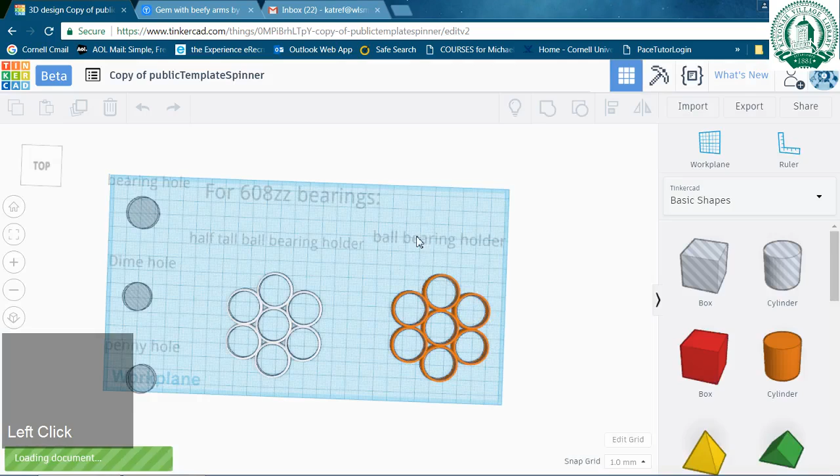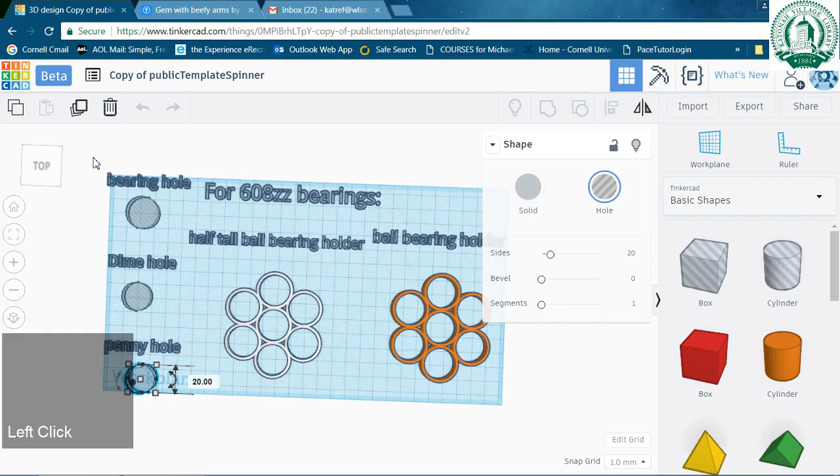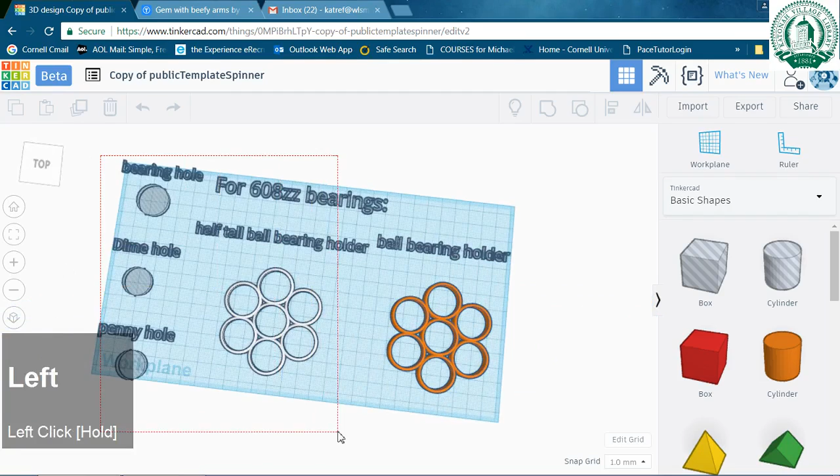In our particular case, we are going to get rid of all this extra stuff, we don't need any of that. We just want to use this guy right here. Honestly, we don't need most of these rings in this particular case either, so I'm going to get rid of some of these. In your case, you can keep them, or delete whichever ones you want.

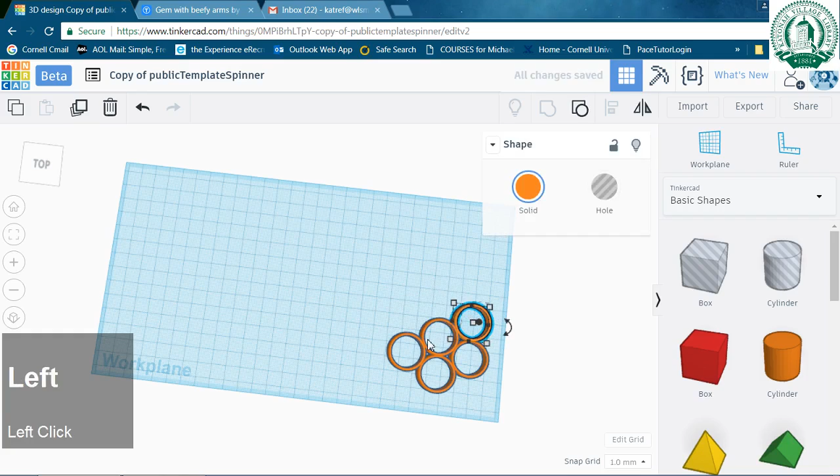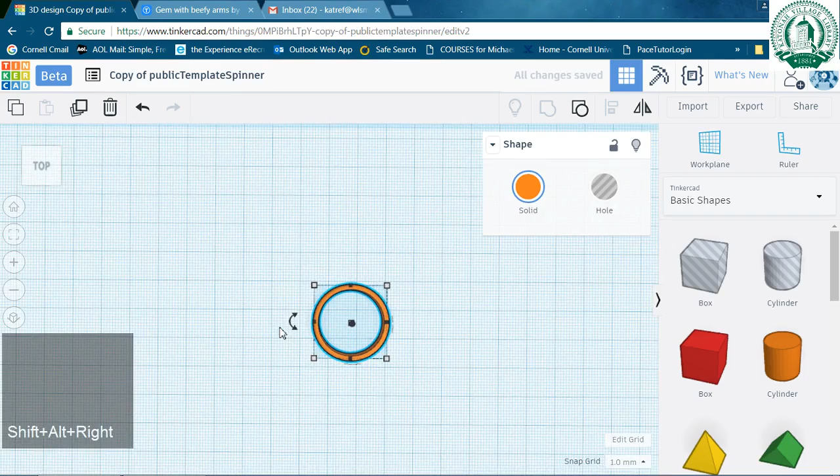To delete, all I'm doing is left clicking on the orange bit and pressing the delete key on the keyboard. Backspace works too. So now I have just one ring, and the reason we went to all this trouble to use the template is this ring is perfectly sized for a ball bearing, and it's just thick enough that it should be nice and durable.

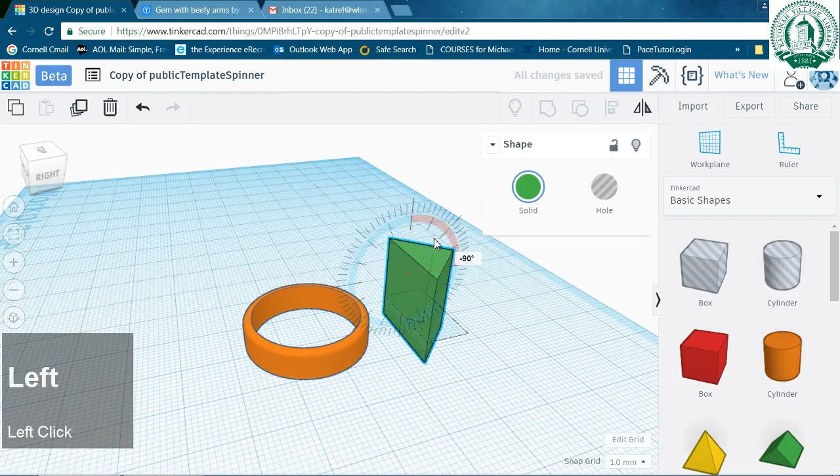Onto this, we could attach whatever we want. So for example, just a super simple example, you could grab this guy, rotate, put it right on the surface, and then shrink it down to match the ball bearing. I could then stretch that out, rotate. As long as it overlaps that ring, it'll print together in one piece.

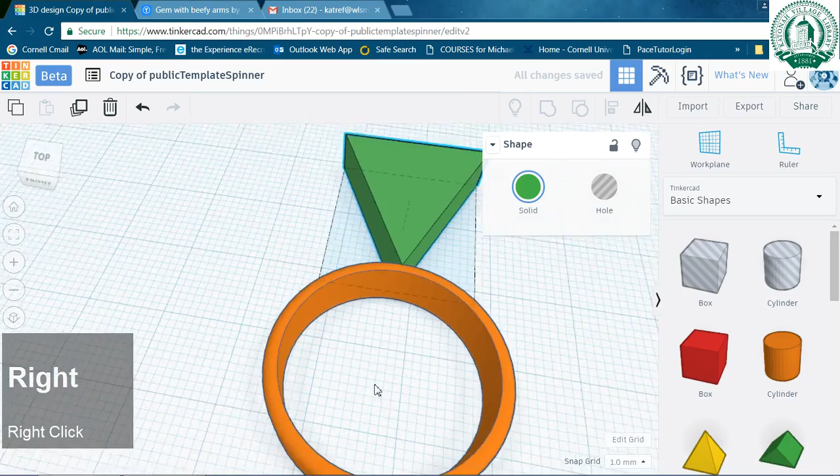In this particular case, let's see if you guys can guess what I'm designing here. Let's make that yellow, that'll give you a clue. Yeah, that looks pretty good.

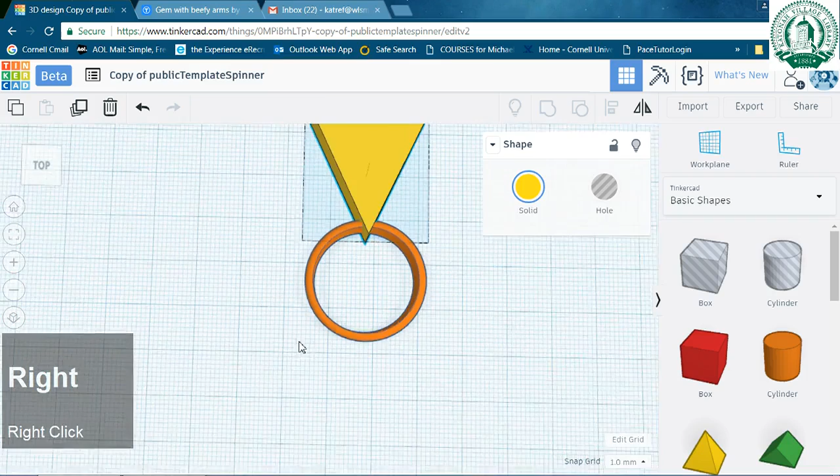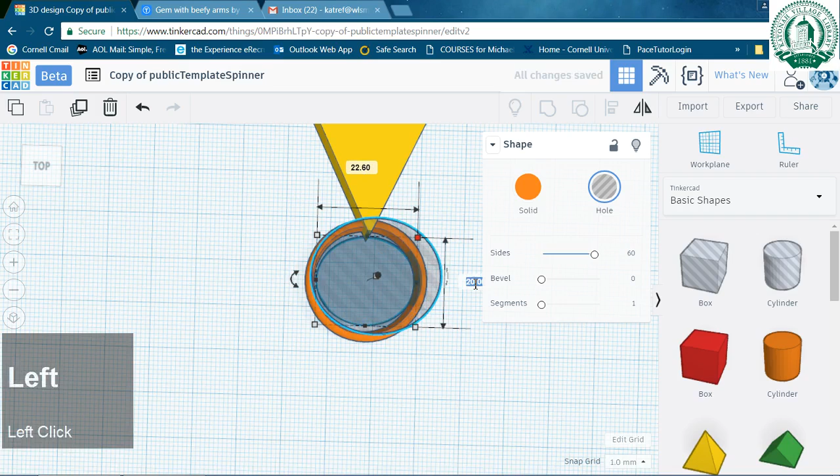You can see this tip is overlapping the ring, so I'm going to grab a cylinder, drop it in the middle here, and up this to 60, and then change the size to 22.6 — just clicking 22.6 right there and there to make it bigger.

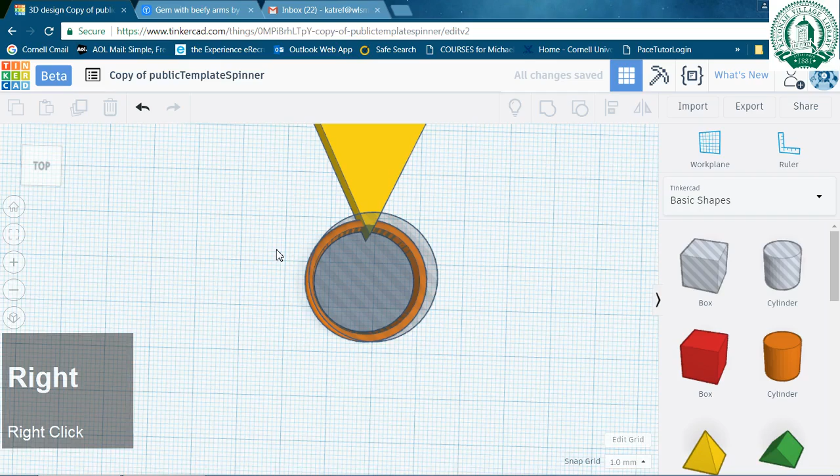I'm going to click and drag to select both, then click up here to align, click here and here. That centers it perfectly in the middle of the loop. Now I want to center the triangle, so I click just here, and that's all.

Now I'm going to scoot it down using the down arrow key. I don't want it to be too thin in any particular part, otherwise it might break. That looks pretty good. I'm also checking the size, as you can see here.

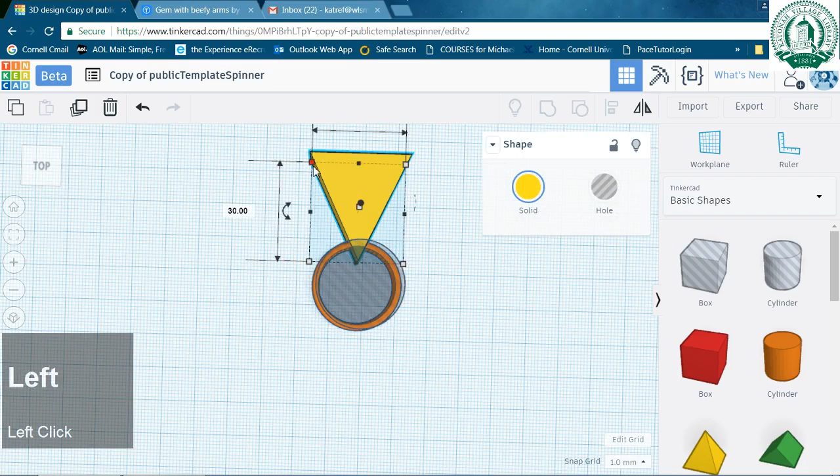So that's 30, and that's about 25. From experience, I know the total distance from here to here usually wants to be 40, so I'm going to bring this in even more — let's see, 1, 2, 3, a little bit under 4 of these little blocks.

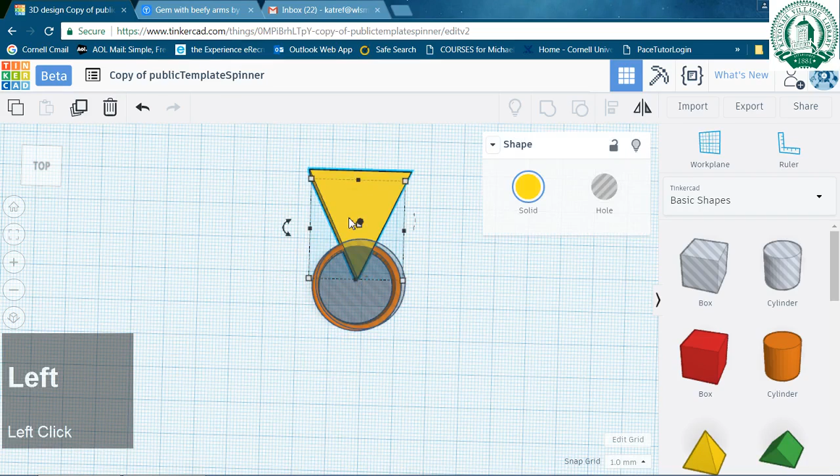That should be perfect. So now I'm going to click on the shape, click on the hole, group — and now it's not entering the ring, which is what we want, otherwise the ball bearing wouldn't fit in here. So now that we have one side of the ball bearing done, we can make copies of it and paste them all the way around.

I recommend you do it that way. You could make it so that it's one shape on one side, another shape here, and another shape there. But generally for spinners, it's better if it stays symmetrical so it wobbles less when it spins. It's all up to you though.

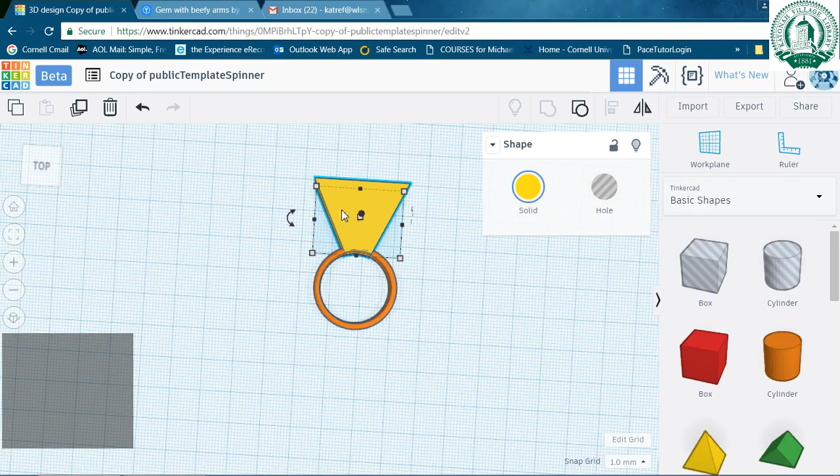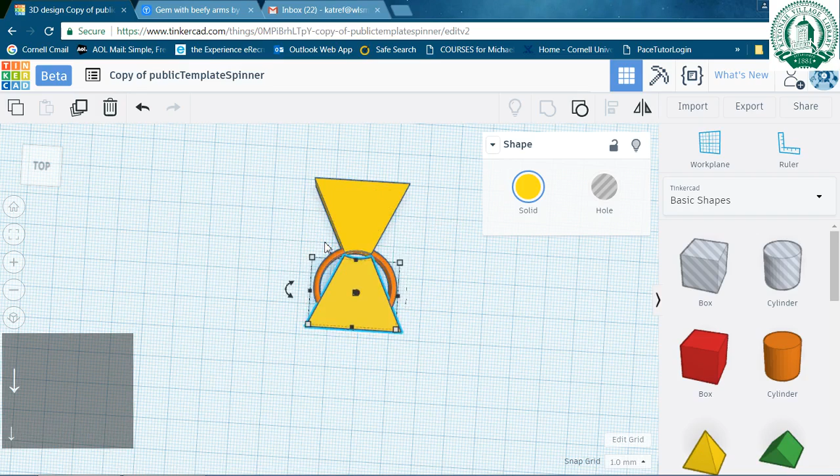So now that I'm happy with one of my sides, I'm going to click up here to make a copy, and turn it around 180 degrees like so. Then I'm going to grab this and use the down arrow key to scoot it into place. I could use my mouse to do this, but generally the arrow keys are much more precise.

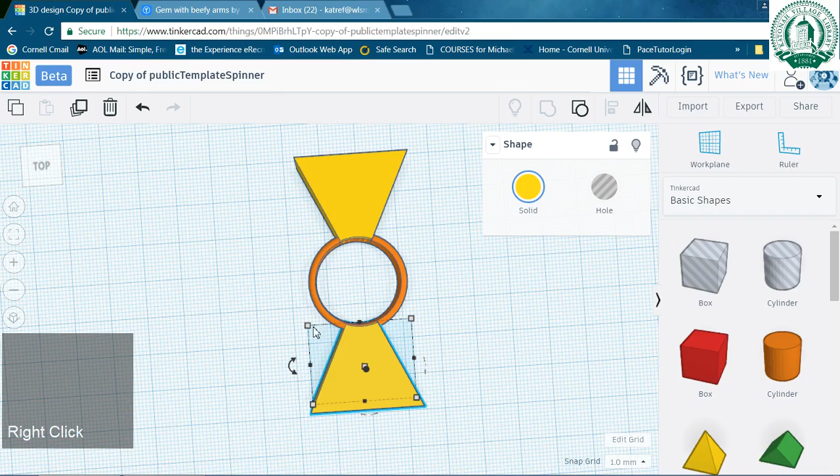So now, this is good for a, what would we call it, a bi-spinner? A two-sided spinner? But let's say we wanted to do 4.

That's actually very simple. You want to hold the shift key and click on the other one. Now both of these are selected, but not this one, as you can kind of see from the blue outline. So I press group up here, and now it's one shape.

And if I press duplicate and rotate 90 degrees, now I have like a, what would you call that? Like a World War II symbol? Kind of looks like something from Germany or something.

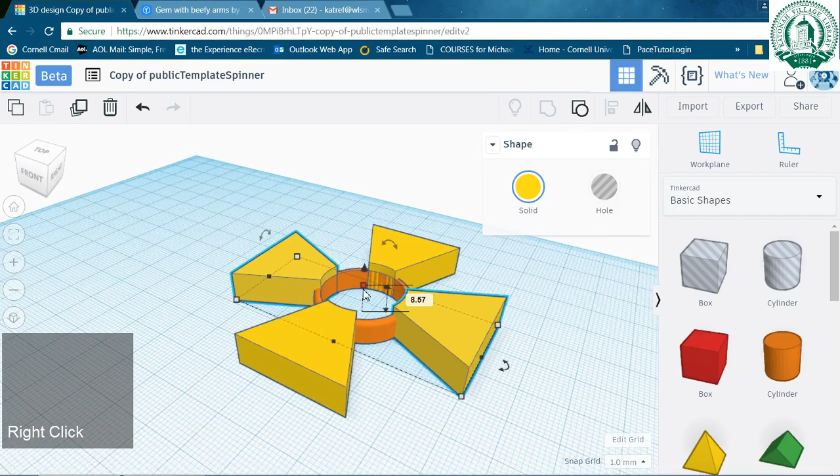Oops, my height's too high. Good thing I caught that. So that should be set for both. It's always useful to look at it from all sorts of angles as you work, just to make sure it's okay. So that's a 4-sided one.

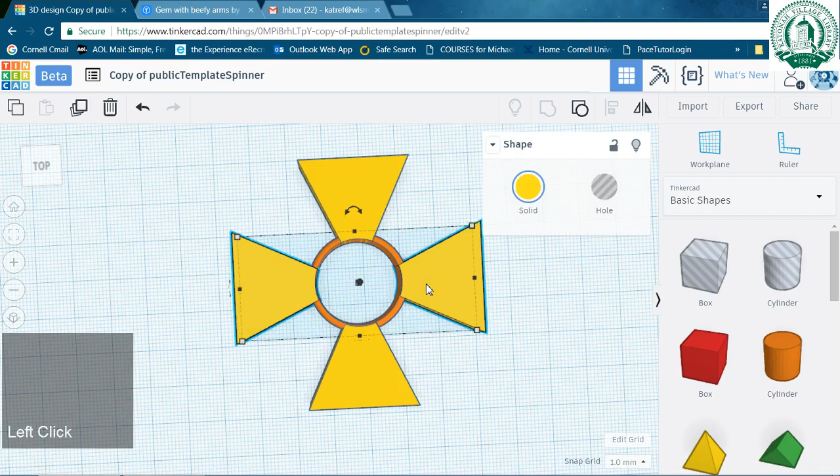But let's say we wanted to do 3 sides. That's completely possible. You could eyeball it and just get it so it looks okay. But if you want to do it precisely, this is how you do it. So we're back to this step where we have these two together.

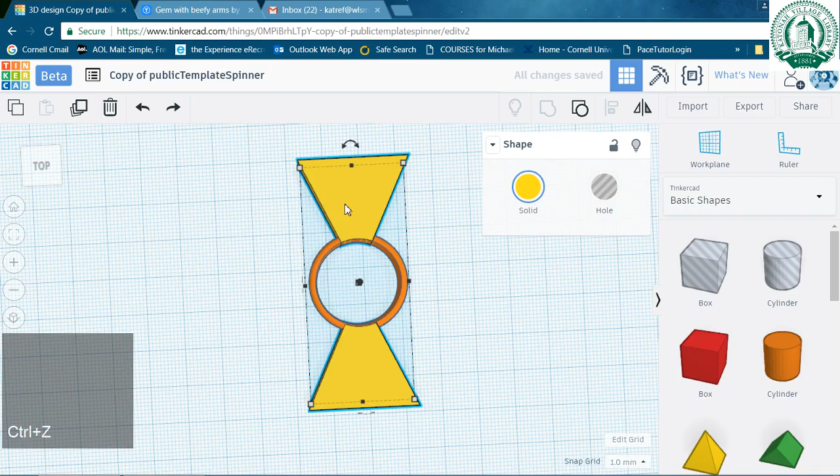And now we want to copy again, but instead of 180, instead of 90 degrees like this, we want to go all the way. Come on. We want to take your mouse and hold it out here, not in here, out here, and go to 120.

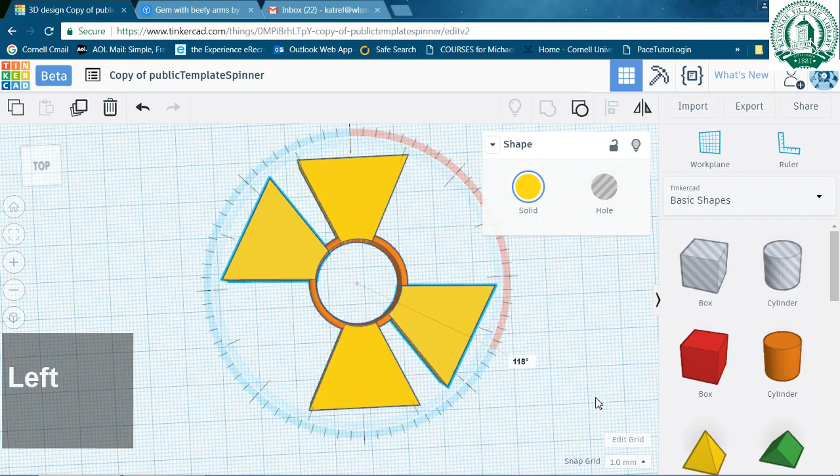And then release when it's there. Then we want to press duplicate again, and it automatically makes another copy the other way. So now, as you can see, we have a nice six-sided one.

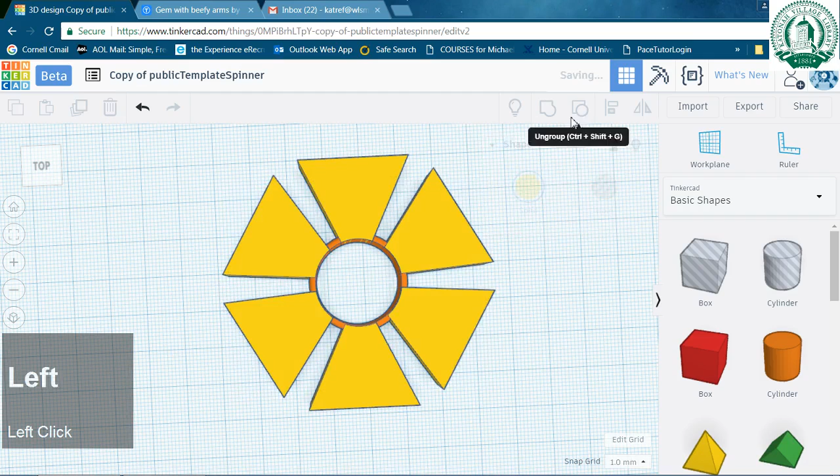And I'm going to ungroup each of these by clicking on them and clicking on ungroup. So now they're perfectly lined up, and I can get rid of whichever ones I want.

Like this is a nice six-sided one, but if I wanted 3, I just get rid of this, get rid of this, press delete key, and there we go. Now we have a 3-sided one, just like that.

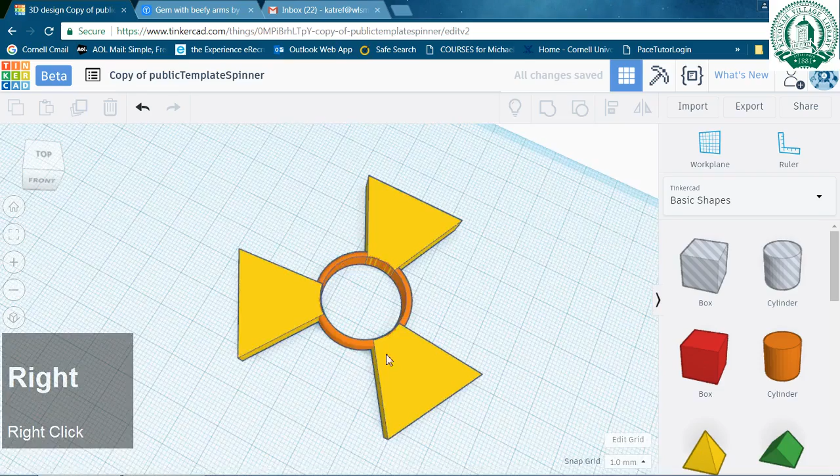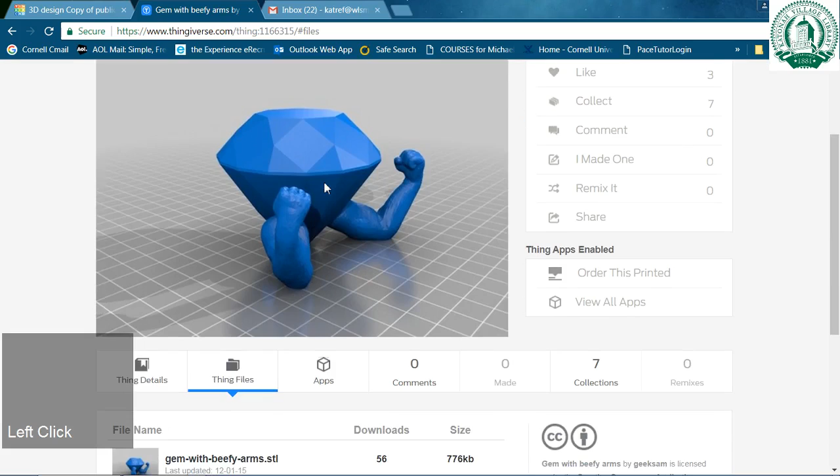As a last note, if you don't want to build the individual side completely by yourself in Tinkercad, you can grab something from Thingiverse. Like, maybe I want those nice beefy arms, for example. So I go to Thing Files, click on the .stl, and download it to your computer.

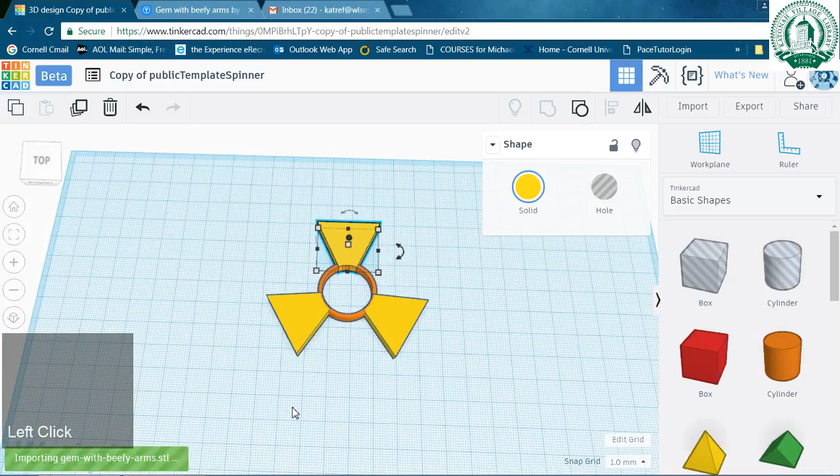Then in here, we want to click Import, choose a file, click the one that you downloaded, click Open, press Import. Now, depending on how complicated the thing is, it might take longer to load into Tinkercad, and also depending on your internet, it might be quicker or slower too. My internet's real slow, so just be patient and wait till it pops in.